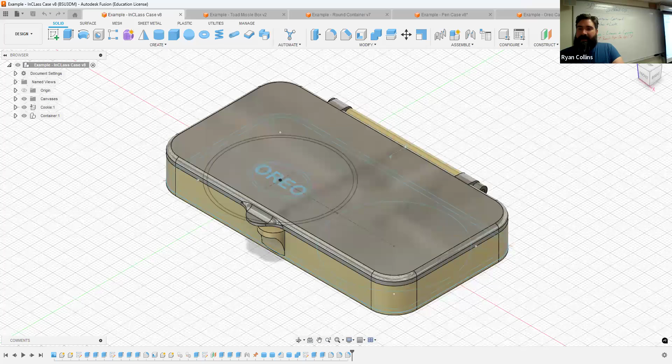So flopping over to Fusion. So last week this modeled this Oreo case to specifically hold two Oreos, just in case. And remember, one of the goals of this is it's not just the case, because the case can simply be a lidded container. Now you can have more than single lids, so if you make it like double doors or anything like that, you make it open up, stuff like that.

More power to you. But it is to hold a specific object, so that means that you are locking in and having, if you need an extra component, which could be like this insert. So if your object is a little bit too small for the container, or vice versa, maybe you want something that holds more than one, you need to have some sort of an insert that takes up space so that the object that you were putting in there fits snugly.

So, even if it's something, forgot the word, not symmetrical, asymmetrical. There we are. I had to work it through. Maybe you're making it for a tool case that holds like a pair of calipers or something. Obviously, it's pretty well good all the way up here, but then the head changes up, so you would need to make something all around.

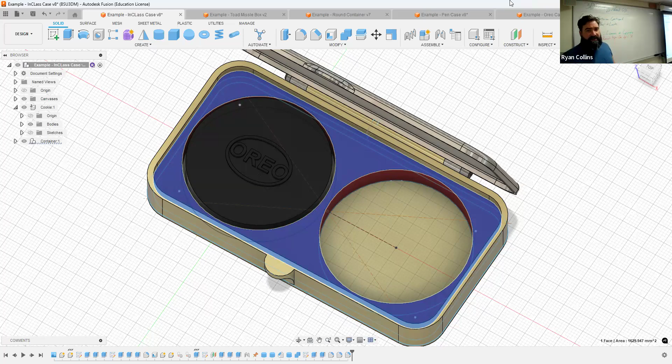Now, again, your container does not have to be standard symmetrical. I don't care if your object or your container happens to be a round container or sphere or something. This is a model I was playing with. This is made from making a shape and revolving it halfway and making two halves of a container, and it opens and closes, that also has one of the things we can discuss, a little bead in the center, or in between, which would make it slightly more weatherproof.

This one also has what we're going to discuss tonight, which is a print in place snapping tab that clears your object with just enough to snap back in place, but enough overlap to where it would actually lock in place. So we're going to discuss that tonight too. All right. And then I'll also discuss how I made the texture pattern and such onto things like this.

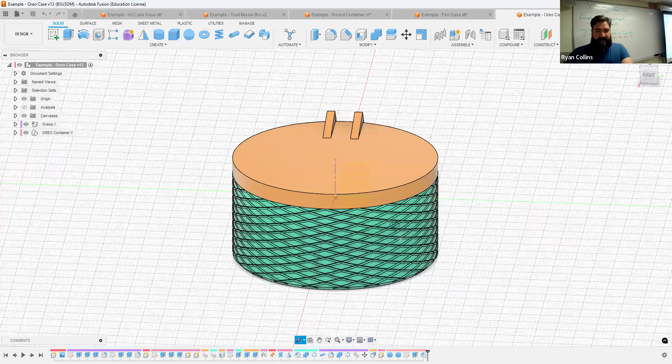But the model I work with is the pen case modeled up last class. No, I modeled up the Oreo case. Same diff, same container there. It currently has little thumb tabs on. So the idea is that you could at least just kind of twist your thumbs and it would pop open. Now, of course, it doesn't actually lock in place yet, and that's what we're going to solve tonight. But since this is a straightforward box, I would like to show more of something if you were to have made a rounded object or not straight up and down.

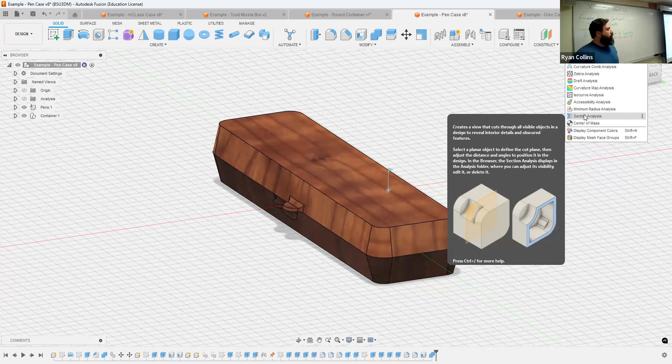Now, one of the things we're going to discuss in how to go about modeling some of this stuff is a section analysis. It's already applied here, it's under the inspect tool. Section analysis simply allows you to create a cross-section view. Now, that does not change your model whatsoever. It is simply a way to view your model. And what I've done here, you place it in relation to any one of the main plane axes. So the XZ, the XY, the YZ. In this case, cross-section you see between, because clearances are absolutely going to be an issue.

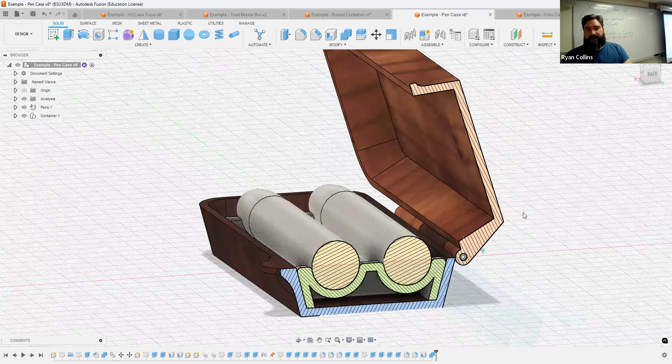So with this model, what I did is made a rich mahogany case that holds specifically two Sharpies. But I also use the section analysis as a way to create the insert that would snugly hold said Sharpie, so it's not just rattling around in there. You can do what you want to do. What this allows you to do is see as it's opening and closing to make sure that nothing is making contact, nothing is intersecting, that sort of thing.

You do have to have your lid and base on separate components, not just objects. They must be in separate components in order for the joint tool to work, to actually get the whole thing to open and close anyhow.

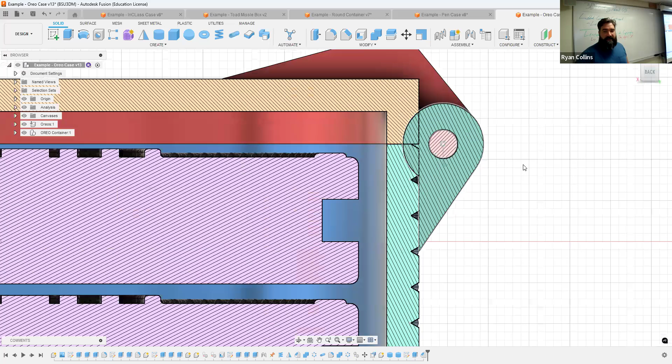So with that, we can see inside, we can look across, make sure that nothing is interfering. I was making this Oreo case and I was making it round. So obviously making a flat thing, being the hinge, on a round thing definitely brings up issues. So when I zoom in, you can see how the hinge for the base model is currently overlapping and intersecting the lid.

Now that part I could easily solve by simply using a combine operation, combine and cut, using the base object as a cutting tool to slice away this partial circle from the lid, and that would clear that up. But that's the kind of things we're going to be working with tonight.

Sorry, just had a little spook there of like, oh no, I do have the microphone on, right?

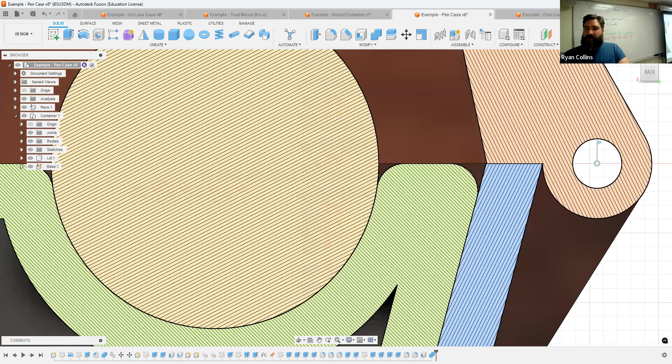So that's what we're going to be working with tonight. And this was the stacking Oreo container. I found models for Oreo, so that's what I was working with. All right, so how do you go about dealing with this stuff? Well, we made this lid, we made this container. And since this is already modeled, we're going to work with this one for now. So I currently made these tabs as just extrusions after the fact.

They're half circles, they extrude up, but one of the ways we were working is adding fillets, so that if we go to print these, we don't have to make a whole bunch of scaffolding supports. It's not impossible to use them, but you could model an object that uses fewer or no scaffolding supports, and it's also stronger. As we discussed before, hard, sharp angles and sharp edges make for a weak point.

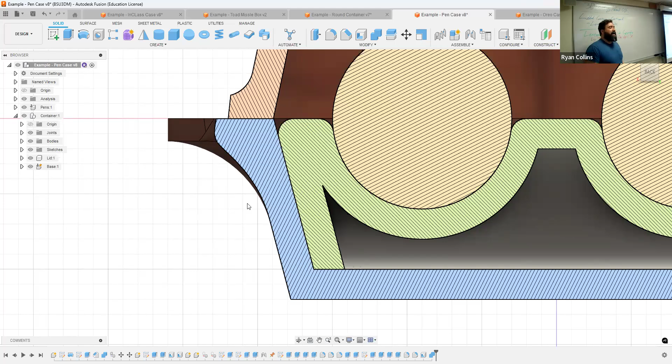A larger curve here allows for the whole thing to be a little bit stronger because, one, there's simply more material. We're not printing these solid, but a curved object is by design slightly stronger than a sharp angle object. The other thing is this overhang, while it might be a little too far outward, with this heavy fillet, this curvature, it allows for slicing without the need for scaffolding. It's not so much that I'm worried about wasting material, but it does add more time to my print. So this is also a convenient way of cutting the printing time.

Same thing with printing the hinge that has such a heavy angle going up to the hinge part. I won't need to put scaffolding on the back either. Now, obviously, the lid would be inverted when I go to print this. Same deal. Got enough of a fillet here that it won't be an issue. And also on the lid, I made the little thumb tab a little bit smaller, so it won't be sticking out in space as much. Same thing goes all around.

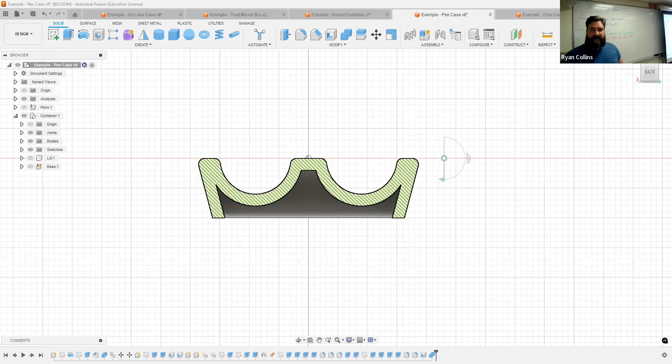Let me hide the lid and bottom and the pens. I made this insert. Let me put away the analysis, as this would just drop into the case, so that would be printed as a separate object. Plus, if I wanted to change stuff out, I could just print the case as it is, and then drop this in. And I even used a shell tool to hollow out some space underneath.

Now, frankly, with standard manufacturing processes, a hollow space would be great if this were injection molded. But 3D prints, at least filament prints, are already hollow anyway. So this is frankly just a little modeling detail. Or they're not completely hollow; it depends on the percentage of infill you use. But it's a nice demonstration on ideally taking up less material. That's all. All right, so let's get back to it.

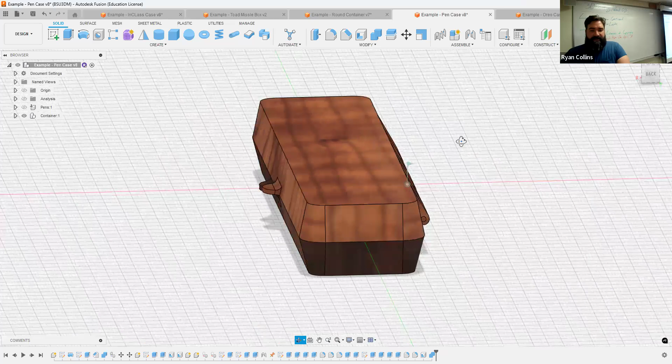We got the lid, we got the case. I can leave the pens hidden for now because they are currently irrelevant. So what do I want to do to make a latch? Simple latch here. We got thumb screws, latch and lock, that kind of thing. It's kind of one and the same; I'll discuss in a minute. The idea of a lock would be more like, instead of built-in, modeled in, this is for my toad missile container. It has the locks themselves move, as well as the container housing a missile. Perfect for the holidays. Pen case. There we are. Okay.

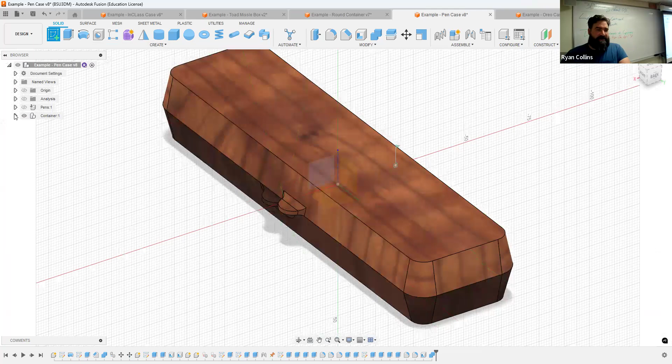So the easiest thing is going to be kind of the same approach that we did for modeling the hinge, in that we're going to switch to side view, and we're going to make a sketch smack in the middle plane there, or smack in the middle of your object. It doesn't have to be, but that is more convenient. Again, if you have difficulty grabbing it inside, just temporarily hide one of the objects, like the lid, that sort.

But it is important that we discussed activating different components before. Now, I made the pens a separate component entirely than the container itself, and the container component houses the two separate components of the lid and base. You can have nested components, but what I do want to do here, oops, I didn't want to add that sketch just yet. Let me go delete that. Because at the bottom of my timeline, when I switch to auto color mode, you can see the coloration delineation for each of the different components, the green all being that insert I used.

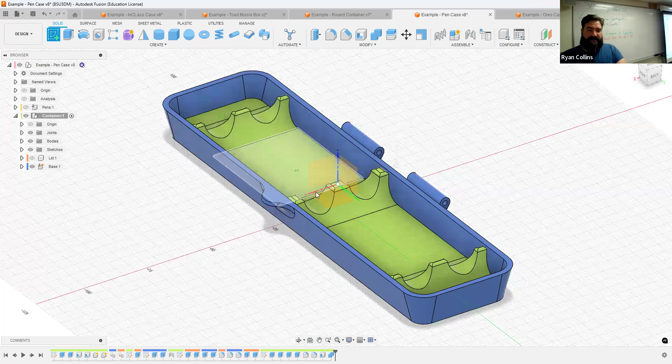So what I want to do is activate the relevant component, which is the container. Now, if you built everything all in the same, not nested, that's perfectly fine. Just activate the whole project. But I'm going to build this specifically inside the container component, but outside of the lid or base. That way, as we did before in creating the joint parts of that object component, I can isolate each one from one another, the lid or base. So I create a sketch bisecting the project here, currently in mine it's the XZ axis. There we go.

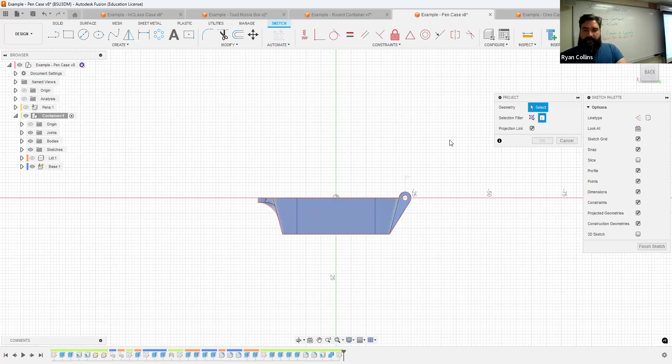Now, since I'm basing all of this on the outline of the container, let's do a projection. Press P or go to Create, Project, and I want to project the whole body right now. There we go. Hit OK. Now when I go to hide the base, I can see an outline. Oh, I don't want that insert right now either. However, that doesn't isolate the tab since I already had that tab made.

You don't have to have the tab. You could do the tab or a latch and such. So as long as you have one of those, you don't have to have both. But since I already added that to this, I want to build around that. But using the outline, the silhouette here kind of messes me up. So I'm going to project again, unhide that base, and use specific entities, and I just want to make sure I grab just the outline, that angle of the side, not including that tab.

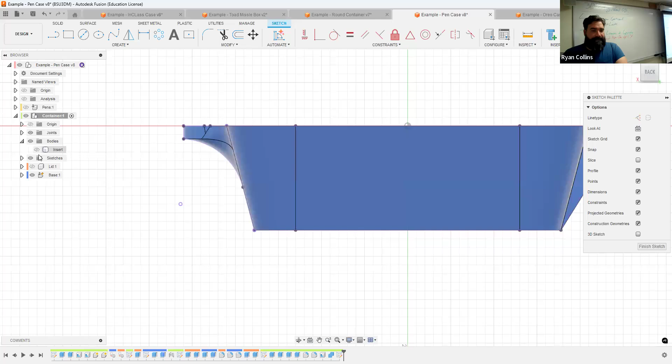Technically, what I could have done is also just done this sketch, moved the history slider before I added this tab, and it would have been the same deal. But since I didn't, and I'm making it after the fact, there we go. Okay. Now when I go and hide the base, I also have that line there. That's important for this case. I'd be doing the same thing for the back, but it's irrelevant right now. Okay. Now I have a functioning outline that I can work from.

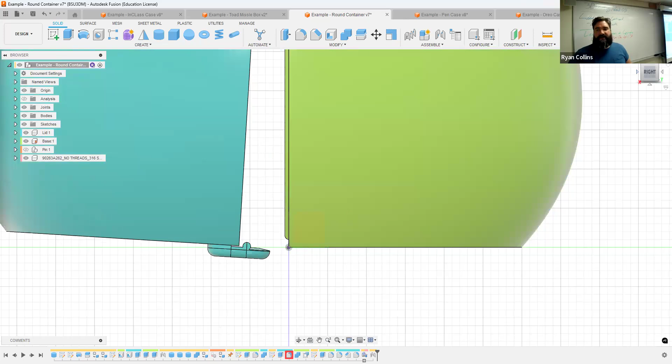So essentially, to make a locking tab, all I need to do, and we're talking very basic here, let me orbit under for this little kind of blob thing, is simply an extension that goes from one side and overlaps the other, but it has enough clearance where it'll still move, but it'll have a little protrusion of some sort that would protrude inside the outline of the other object.

So what I mean by that, I have a section analysis here, let's zoom in a little bit. Now you can ignore this little bump because I made that to create like a weather seal on this container. But what I did is it has an overlap. There's a little gap, but then there's a little protrusion that sticks inside of the outline of the other half of the object. And as I move, it does still technically overlap a bit. That is okay, because even though we are printing in pretty strong plastic, it is still plastic and it does flex just a little bit. So it would push up and around and snap past back and forth.

Now the trick is, don't make that overlap too big to where it won't actually go past, or it'll go past and break the tab off. So this is also one of those places where you have to do a little trial and error.

Rounded part protrusions work well. An angled protrusion works well, but flat with sharp angles, like 90-degree angles, do not work as well. But you can always round that out. The other part of this is where this model I made has this little weather stripping bit here. Yeah, technically that would perfectly fit.

But as we've experimented with 3D printing and such, we know that there is a teeny bit of squish that occurs, a teeny bit of expansion as the filament comes out of the nozzle and gets deposited down onto the print bed. So it squishes out just a teeny bit. This is not precision manufacturing. It gets real close, but we do have to build in a little bit of clearance.

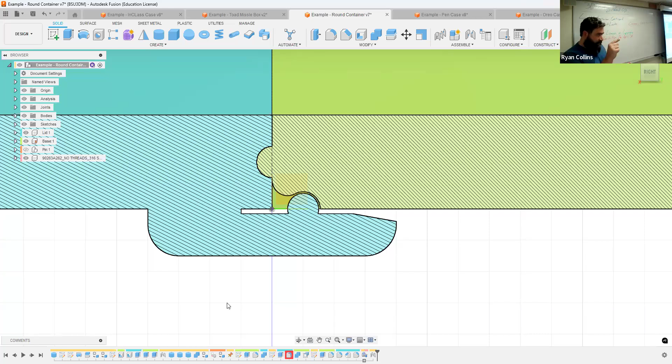The clearance allowances that I usually use are, since we're working metric, usually something around 0.05, somewhere between that and 0.1, 0.1 definitely being on the higher end. If you need, you might go all the way up to 0.15. Again, that's millimeters, so it's quite small. But just that little bit of clearance usually is enough to compensate for that little bit of squish.

So meaning that if I print my hinge here, let me turn off the section analysis. The clearance on this model is no clearance. That little teeny bit of squish might make it to where when I go to print this and put them together, it won't quite fit. So I have to use sandpaper or filing or anything like that. But if I put a little bit of clearance on there, it'll slip right in.

Of course, the flip side is that lack of clearance and having to sand and file an object into place allows you to get a really nice snug fit. Whereas adding the clearance in, it might be a little bit floppier than you would like. So that's the part you have to weigh out in modeling your designs, or trial and error. And hey, if it is a little bit too big, well, print it again. No big deal. Okay, so that's the whole rundown. Let's get back to actually modeling this thing.

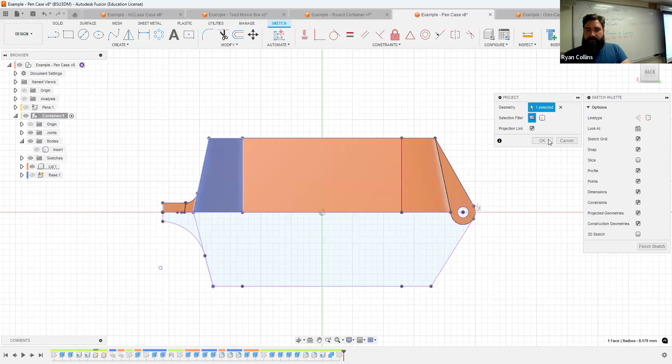So for this, you could draw this by hand, by line, something like that, whatever. But if you want to, again, let the program do the work, just use an offset. I'm going to turn off the chain selection because I only need that line and maybe that line. I don't know why it's going back around the bend there, but let's make it at least a little bit bigger. Let's make it a 2 millimeter offset. Sorry, the word fell out of my head. There we go. So this comes off a little bit. You can see how that's going to go.

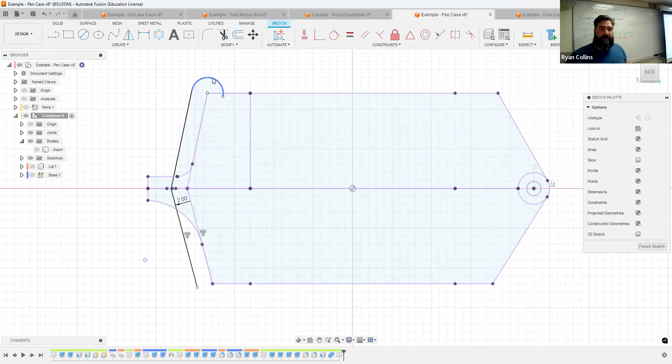All right, I don't know why I did that, so I'm going to delete that line. Oops, not that sketch. Delete that line. Cool. Double clicked. Okay, so I just need to make this. If this were a flat section, I could probably just use a center point rectangle, go out a little bit, make it 4, make the other one 10, something like that. Even that could work. So whatever you want to do, really. I'm just going to model this in a little bit more to match this design.

Delete there, delete there. Okay, so I got this, but this is a little excessive. So let's chop it up. Let's draw a line. I'm just trying to define how far down I want to go. All right, 5 millimeters seems reasonable. And I'm just going to use that as a reference line, so press X to turn that into a construction line. All right.

Now I'm simply going to draw across to close that part of the sketch. And I'll do the same up top. If you want, it doesn't even have to be flat. You could make this at an angle or something. Basically, you could treat this like the backside when we were modeling the hinge. Cool, whatever. So I know I'm going to have these sections there. Great. Finish sketch. There we are.

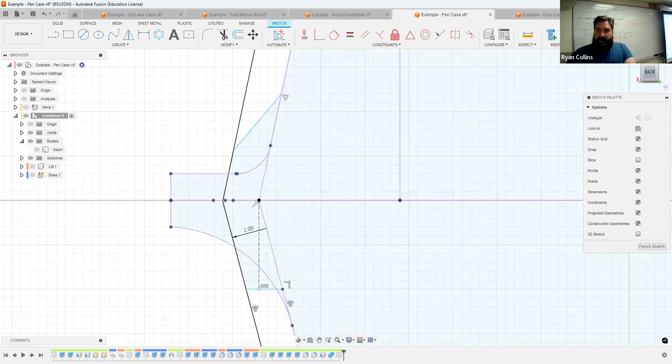Okay. Now for right now, like we did before, I want to extrude this, but I want to make sure that it automatically bonds into this latch and such. So let's make sure I grab those sections. Of course, the problem is now I have multiple stuff, so hide that object. So I just want to make sure I'm grabbing the sections that go across. Problem is since I have kind of a complex shape here, it gets a little obnoxious. Not a big deal.

All right. We're going to extrude that. Didn't select all the things. But, oops, I should have done that first. Make sure that you activate the component that you want to attach this to, being the lid. So, even though it's hidden, when I go to press extrude and select those chunks of that sketch I just made, when I start to extrude it, I have the body hidden.

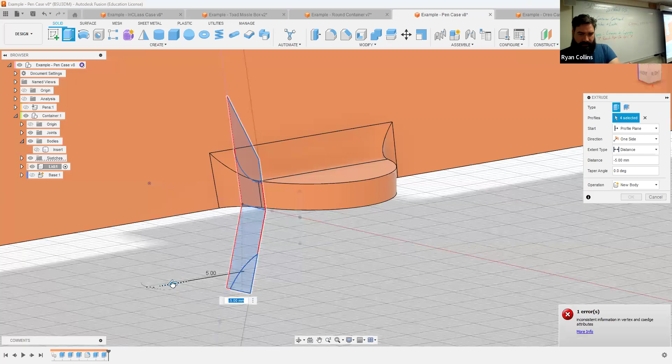Where'd you go? What's going on here? Why is it? What's going on here? It's not extruding. Always something new to discover. What's the problem here? Sorry, give me a second. I'm not sure why this isn't extruding.

Okay, sorry about that. Figured out what it was. The sketch that I had built had a bit of an error in it. So what I did is I reactivated the whole container project, went back into the sketch. So edit sketch, went back in here and made some adjustments and turned a couple of these lines from regular lines into construction lines, so it did not interfere with the sketch as badly. So that should have corrected it.

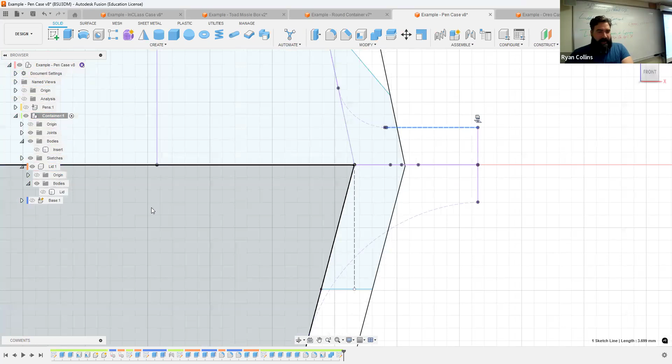All right, so back to activate the lid component. I want to extrude. And if I have difficulty grabbing that sketch, I am also having issues because this tab is here. If you do this after modeling the tab, don't. Okay, so I was just trying to get those two pieces. Want to extrude outward. However, it is currently reading it as a cut because it is placed here. You will not have to deal with this if you just model this as a latch instead of a thumb catch here.

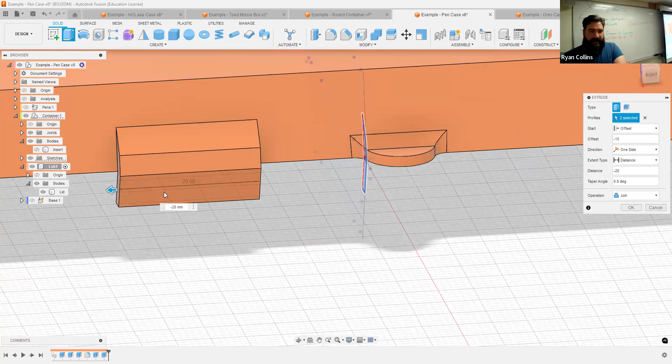So I'm going to have the start point as an offset, and let's go -15. Just moving it over here a little bit. Now I can set this -20 as how wide I want to make the little latch piece. Ideally, you'd be placing this smack in the middle of the model. But since I currently have it as operation join, even though the sketch is under the container component, I activated the lid component, so it automatically is joining to the lid as part of that component. Hit OK. All right, cool. So that would be a latch.

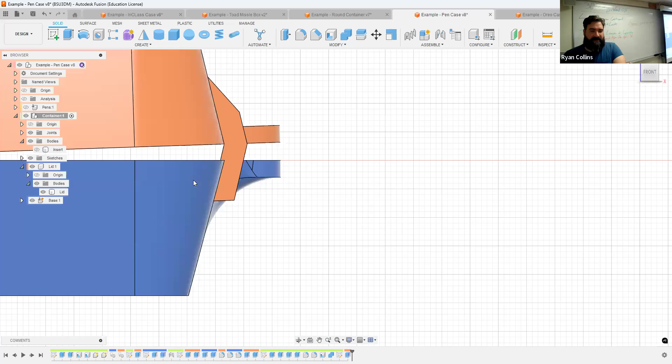Now let's look at the base. Obviously, this is going to cause problems because of the way this object is modeled. Because when I go to open this, look at how much intersect is happening, how much is being overlapped there. So what that tells me is two things. One, I should do this not on a tapered model. But beyond that, I need to shrink the length of this tab. So let's go back and edit the sketch just a teeny bit here. I should have had this sketch line way up here somewhere.

Cool. So all I need to do, let's just trim that down. I'm just grabbing a line somewhere. Sounds good. Okay. I go to edit that extrusion, take out that chunk. Now we're just having this little section here. Cool. I'm still going to have some overlap, but that's all right. I'm probably going to need some of that.

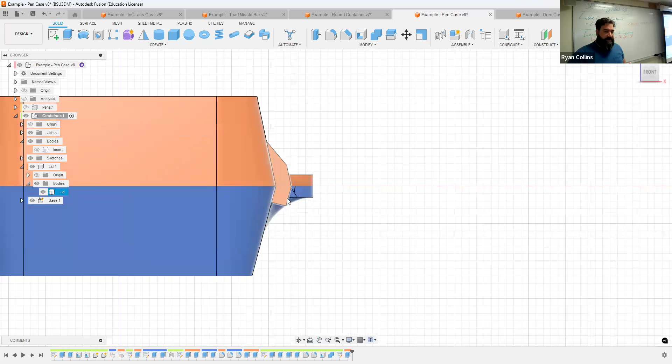So one easy way around this, if you have an inconsistent container, like it's tapered or something like this, honestly, the best way I have found: base your drawing, your model, or at least this part of this tab, around a circle that starts in the center of your hinge.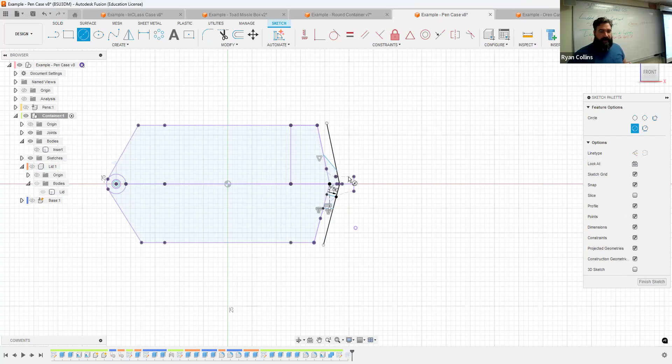So one more time, let me go back into the sketch. Let me hide these two components because it's just in the way. And I'm going to draw a center point circle starting smack right there where my hinge starts. And then I can just draw outward. Let's see what would be reasonable as a way to clear. So if I bring that circle all the way over here to that center point, hit OK, finish sketch. So now I have that big old circle. It seems utterly excessive, kind of is, but it's way out here.

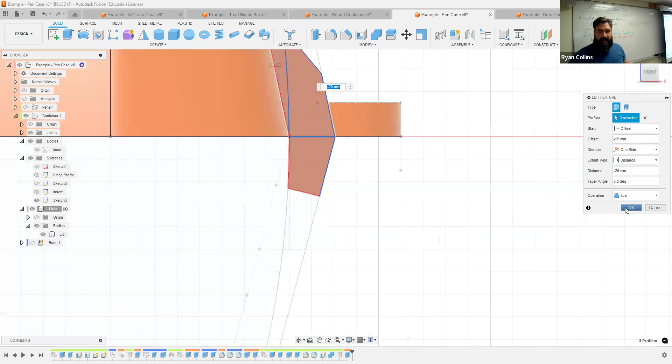Let me go to finish sketch. Hid the stuff because I had the... there we go. My hinge sketch. I don't know why it automatically hid. Let's go back to that last extrusion. Edit that sketch again, edit that feature. And I want to consider that circle line. Just going to deselect just that part of that tab. Hit OK. All right. Now left this kind of seemingly big old chunk here. But when I go to open this, now it does not intersect, overlap whatsoever.

So adding that circle as part of your sketch based on the center point of your joint is an excellent way to just very easily consider the clearance regardless of the outline of your container. As long as it is opening based off of that circle, you're good. Now we still have to add a little tab in there, but we'll deal with that. Okay, cool. Got that sketch, got all that yada, yada, yada. Now I can go back and edit that sketch a little bit. What did I show before?

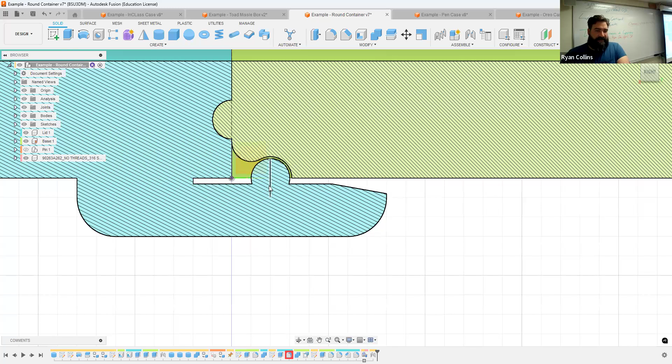In my round container, I made this, let me snap back in, section analysis. I used a circle. I have found that starting with a circle makes it a little bit difficult because at some point trying to consider clearances, you're going to have this little point where the circle starts to go back on itself when it gets past the halfway point. So a little extrusion that is instead rounded seems to work a lot better. So let's go with that. So if you want, you could have included this in the original sketch, or we can go back and add it. So once more, we had edit sketch.

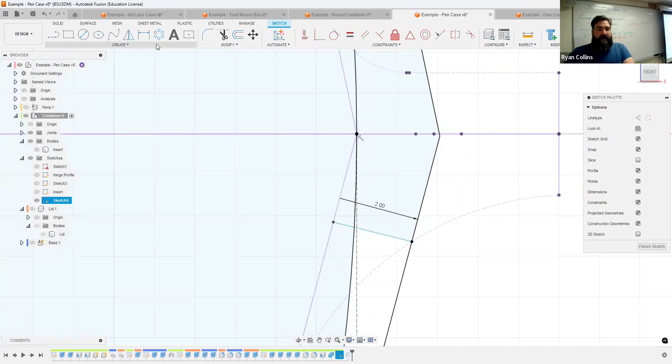Okay. Hide those parts because they're in my way and they're just obnoxious. Cool. Now, my sketch is getting a little complex here, so it's a little bit difficult to see, but that's just because I started adding a bunch of other stuff. If you start with that circle and then just kind of build outward from there, this will be so much more simple to work from. Oops. Deleted the wrong line. Cool. Okay. So I need to add something right in here. So let's add a center point rectangle. Cool. Based off of that line, somewhere up here.

Honestly, I don't need it to extend very far. So let's say to 1. That's pretty significant. 1 millimeter, at least on this design, should be all right. Tell you what, let's just make it a square. 1 by 1. Cool. All right. Go to finish sketch. Once again, one more time, edit that extrusion. I want to include that little chunk of the tab, join. Cool. Now my model, oops, lost where it was. Now my model just has that little point in there.

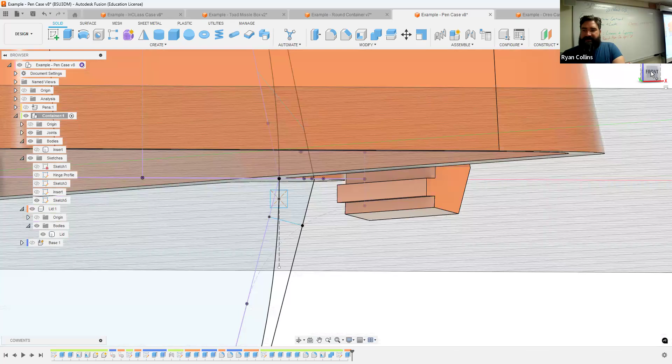Great. I'm not going to worry about it, since I already know it's going to clear the actual overall tab, but my chunk here is going to protrude a little bit into my design. Good. I want that little bit of a catch. Now, again, if you have quite a tapered model like mine does, you might want to extend it a little bit further, but we'll deal with what we got. I can always make that a little bit longer if need be. Okay, cool. So let's hide the base for a moment. And now let's just kind of tweak this a little bit.

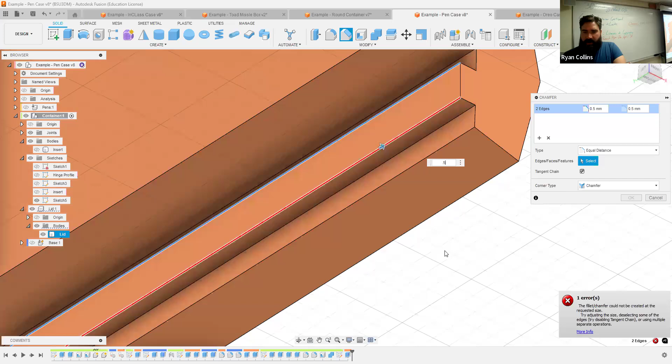Easiest way to work is either a chamfer or a fillet. So let's put a couple of those onto here. Whoop, whoop. It keeps snapping my model way over there. You definitely want to put a chamfer or fillet on these edges. Let's go by 0.1, 0.5. Why is 0.5 giving me... Oh, because it's not that far.

Let's say 0.3. There we go. You definitely want to add a chamfer, especially to the bottom or the leading edge, but might as well even those out. You could use a fillet as well. Doesn't matter if it's flat or rounded, either one. But again, a sharp edge is going to run into things and is not going to allow it to clear whatsoever. Cool. Okay, great.

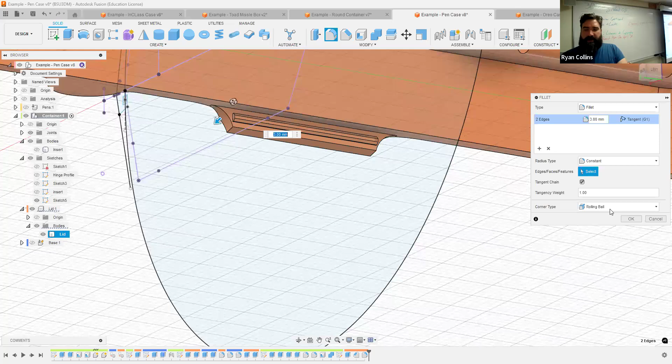From there, if you want, you can go ahead and make any changes to this as you like. So things like if I want to start adding fillets to add a roundy bit onto the sides here, cool. Why not? Let's extend that out, like we did for the little tab there. Neat. Let's throw a little bit more here. Repeat fillet. I want to round that out a little bit more, just so it's a little bit stronger. There we go. It even extended past my original model. No biggie. Okay, cool.

I've also found that if you add either a chamfer or fillet, let me hide that sketch, it's just in the way, to this leading edge here, you can kind of get your thumb underneath it a little bit easier if you needed to. So let's add a chamfer to that line also. Let's see how far I can go. Ooh, that'll actually work pretty well if it's still modeling okay.

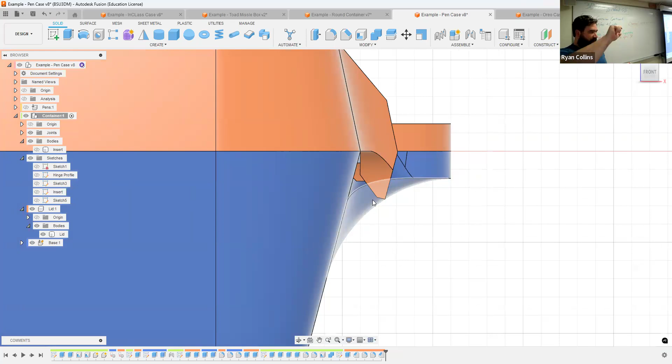Great. Because now when I go to the side, unhide the bottom. Okay, for the other side. There we go. Even though my little tab definitely now intersects inside, that little bit that protrudes has got a little bit of a back cut to it, so I can get my thumb in there and help pull the plastic just a little tiny bit when this is printed.

Cool. All right. So how do we figure out clearances and all that kind of stuff? That's where we throw that section analysis down. But my section analysis is way over here. No big deal. All we need to do is edit that analysis. So go to edit feature on that, and it's on a slider. So just drag it back to where it makes sense. Somewhere in there. Now it's getting to where I want. Now I can see my overlap, and I can work with that.

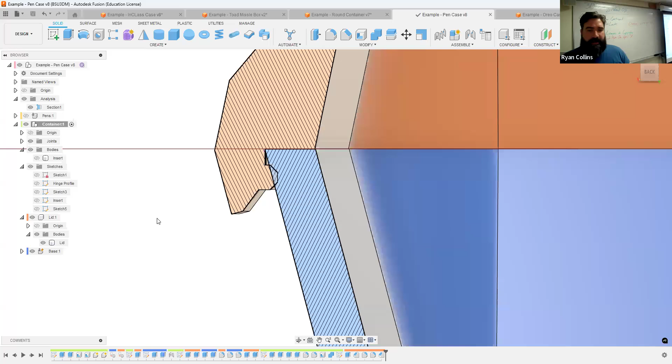Cool. So now what I need to do is make a recess. This is the easy part. But before I go any further, what have I not done? Saved. So, add tab. Cool. Save often. Okay. This part's the easy part. I'm going to use a combine tool. Go to cut. My target body is the bottom half, and my tool body is the top half. Make sure you select keep tools. Otherwise, it'll just delete the whole top. Do that. Hit OK. Cool.

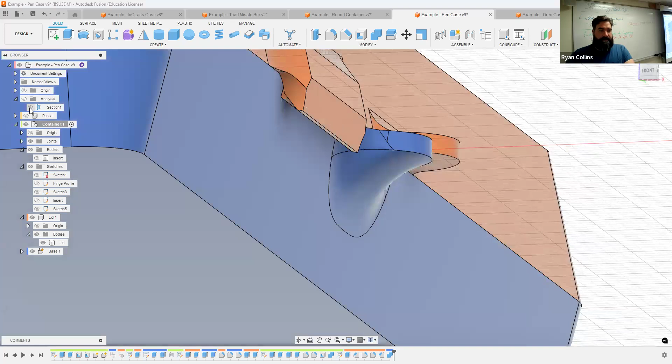Now I go to hide the lid. Now my model, let me hide the section analysis, has that little tab slot in there. Now, again, because I already made this little tab here, I'm going to get some funky results because it's deleting little chunks in there. But honestly, it'll still work because it fits. That little tab, turn the section analysis back on. Oops. Now, as I zoom in, whereas I had an overlapping design here, the colors overlapped, now it does not.

One last thing, though, I do want to build in that little bit of clearance, because right now, if I printed this, that little tab is going to be pushed just a teeny bit outward, and it might not snap into place as well. So let me hide the lid, and I want to isolate just that. Turn off the section analysis again so I see everything, but you can still model with the section analysis on, so long as you're not having to grab something that is currently hidden. Because again, Fusion works on what is currently visible.

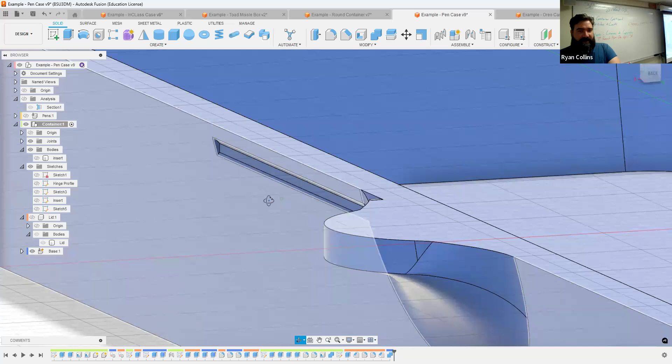Now, what I want to do to add clearance to that is a different version of extrude. It's the first one over here. It's called press pull. Basically, it's an offset face. It's still an offset tool, just like we've been using to make multiple lines, anything like that. The hotkey is Q if you want to use it just on the keyboard. But it allows you to simply modify geometry that's already there, like it says. Not animate because I moved my mouse.

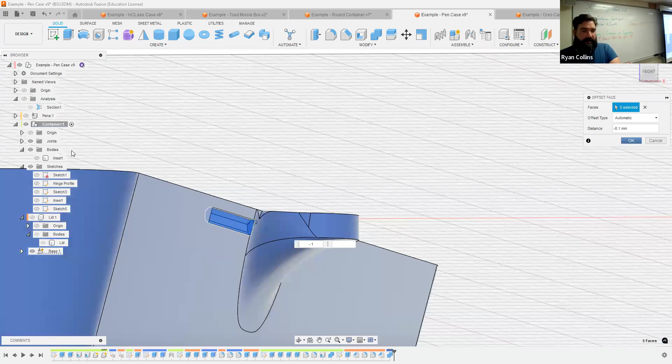So what you can do, go in, select the faces. I want all three of those back ones and also the two sides. So grab that, and I'm going to offset, we'll do 0.1. So what that's going to do, oops, I shrank that. Make sure it's negative. There we go. 0.1, there. Activate section analysis again.

Unhide the lid. Now, when I zoom in, I've got just that teeny little gap, which frankly looks enormous in this case, but it's pretty tiny. Honestly, if you feel like it's a little bit too big, go back in, edit history, or edit feature, and let's turn that into a 0.05.

Cool, there you go. Now, one little thing here is you might end up with that there. You got a little bit of a catch there. I think that'd be fine. Actually, a little bit snug right there would be fine. And at worst, if you printed this and there was a little bit of an interference, use like an emery board or some sandpaper. Honestly, emery boards are some of the best tools to use for modifying prints, and file that little chunk away.

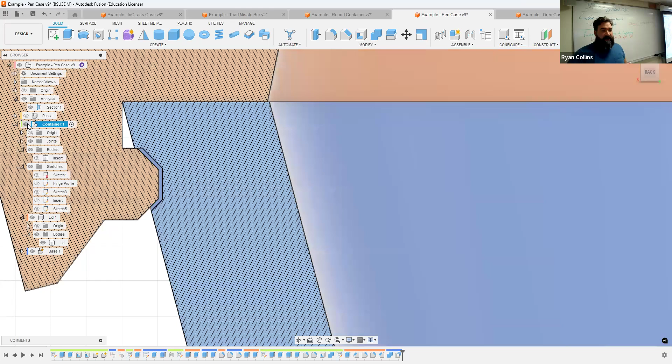But there you go. Seems a very roundabout way of working, but basically all we did was just make a cross section. The only difficulty there was simply that I had already modeled these finger tabs in. All you need is just some kind of projection that goes from one side to the other, that's got a little thing that sticks out and goes technically inside the other object. Again, my round container is a much better example.

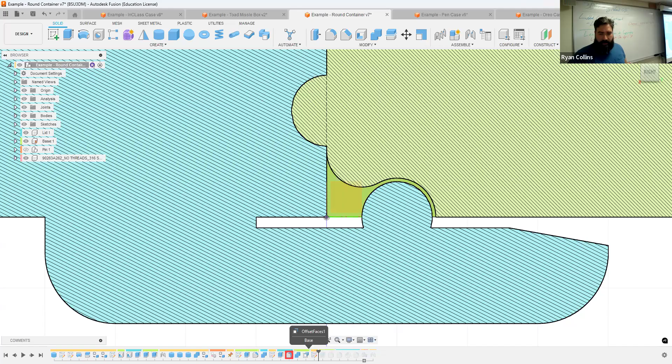And this one, because of how this was modeled, what's going on here? Originally, it was just a cutout of this circle, so a semicircle, and I used like a 0.05 clearance there. However, there was still a lot of material right here. So what I had to do was make a new sketch underneath, and I'll show you this. I had to hide the lid, and I made a new sketch of just this little tab here.

There is just a little chunk, extruded it upwards, just so I could push this little bit up a little bit. And you can see as I go back and forth here, all I did is I would just push this material up a little bit using a press pull, just so I had a teeny bit more clearance.

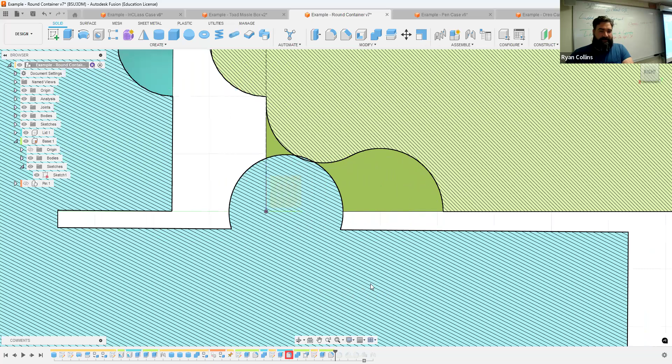Now it was still going to intersect a whole lot though, even with that amount. Again, this is like a 1.5 millimeter diameter circle, or radius, I forget, sorry. So what I ended up having to do is add a fillet to these two sides, that when complete, round it out. Now I still have just a teeny bit of overlap. That's okay. That will allow my print to work back and forth.

Now, one thing about this print here, as I've designed it, I want you to note what I just said before. Sharp angles are weaker than curved angles. So right here, I've actually accidentally modeled in a very weak point. This print goes back into itself by just a little bit. So I'm creating a stress point as I try to push this past. I'm very likely to break this off.

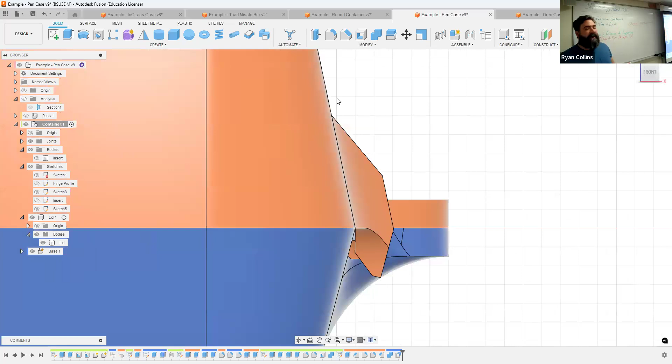But in this little section in between, if I close this off, modify the original sketch for the tab, and even better, if I add a fillet from the center line to the bottom of this circle, I will make that tab much, much stronger. Same thing for over here. If I add a fillet on the back side here, like I have done with my pen case design, or in this case, a much larger chamfer, same deal. I've just gone beyond the simple right angle and added material to it. It makes for a physically stronger print, a physically stronger design.

So there you go. Simple tab, really easy one. We'll take a pause, and then I'll show you how to model a more involved lock. Okay, so like I just said, for the sake of time, I will, in a separate video, discuss making the actual lockable latches, the separate components for this. It's basically a combination of the thumb catch latch that we just made for the pen, and the general hinge. It's just a little bit of both.

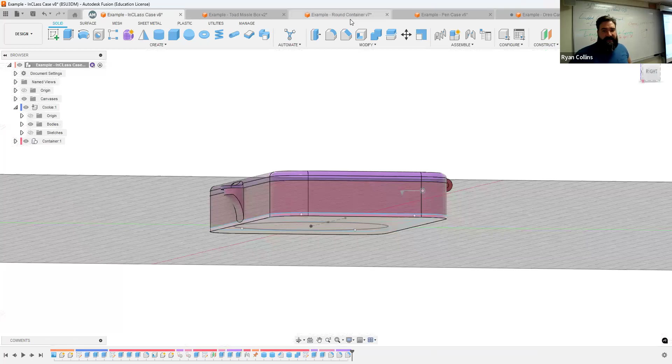So for that sake, I wanted to specifically discuss how to work with a hinge on a round body. So far, all of these models, even my technically rounded container, the hinge was built onto a flat shared surface. So with this Oreo case here, what I did is really the exact same thing, but let me show you what I did here. Activate container, and when I made the hinge, let's see here, I forget where exactly I built this, prior to all of that. All right.

So what this would have been is I took an outline, a projected sketch of both the lid and container, and then just like we've done before, made my hinge design, based directly on the split line. So I drew a circle out from there.

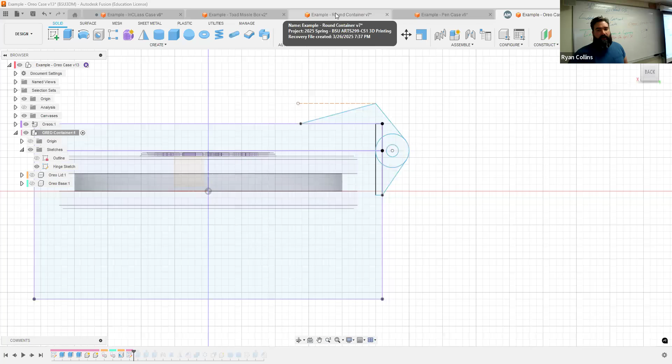But what I did with this one, instead of like the pen case and such, where the hinge is floating entirely outside of the body of the container, for this one I did have it overlap, and it actually begins on the inside edge. So what I did for that is I used a 2-point circle. So I'll go into edit circle. So instead of using a center point circle, go to create circle 2-point, and I started there and drew outward. And it's a 5 millimeter circle.

With this one, I was still intending to use a bit of filament fed through, but that's also large enough if you wanted to open up that size and use actual rod or threaded rod or a long screw, you could totally use that too. But I just made that the extrusion, drew my ears onto there. This one I was playing around and made more like a big industrial hinge on top. That of course presents problems for printing, but I'll deal with that later.

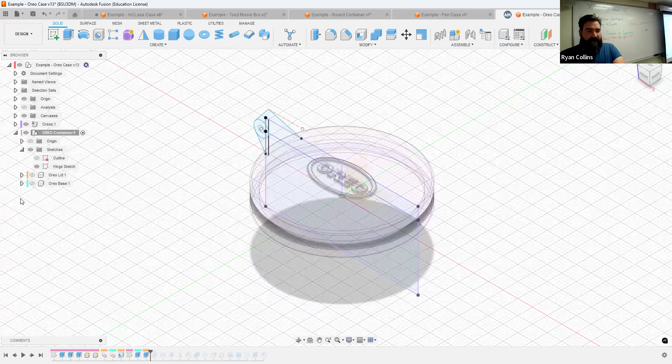From there, like before, adding the extrusions of top and bottom, activating one component, making the extrusion for one lobe, activate the other component to make the extrusions for those two. Whoops, I didn't mean to do that. There we are. So now both lobes, both sides, adding the joint tool so that it now opens and closes. Oops, that's before I grounded one side.

Now with this one, I did also go through creating these knurls on here, but I'll show that in a minute. The main issue with this model is if I go to the top or bottom, well, you can't see this clearly from the top, but from the bottom, since I'm making straight extrusions, that does not match a rounded surface. So how do you compensate for that? Well, one of the easiest ways is actually using the press pull tool that we just went over.

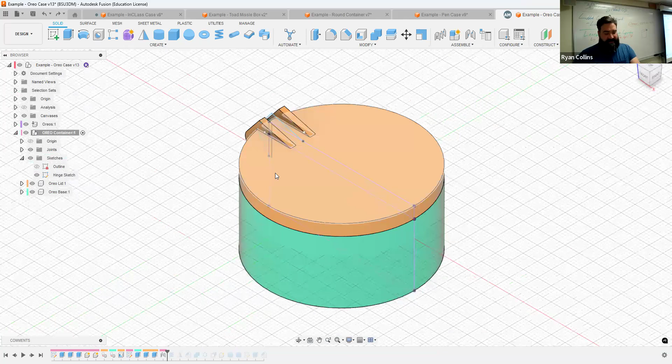Now you can of course always go back in, modify the sketch, and simply make that sketch of the inner of both side lobes extend internally within the walls of your model. But the issue with doing that is, what if you have chosen to make the walls quite thin? This one has plenty of material there I could have extruded outward from. But if you made them quite thin, it's a little bit more difficult to deal with.

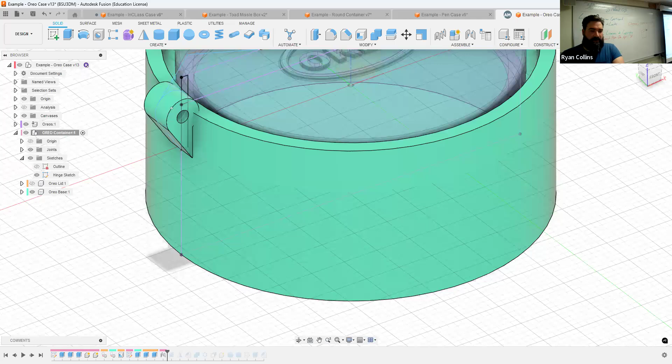So how I dealt with this, and I can do this before or after making those knurls. In this case, I'm going to do it afterwards, but you could do this before you added features. I'll explain this at another point. But how I did this is I used the coil tool to create an outline, which is this tool. It is essentially a pipe tool, just built into a spiral. It automatically generates a spiral path instead of you drawing your own path. So it's essentially a pipe tool, and you can select different profiles.

In this case, I chose a triangle, mirrored that triangle. Sorry, let me move in the center. Mirrored that triangle, and then, well, I put a chamfer in there. Cut into the surface, and then used the circular pattern tool to make a whole bunch of them. And that's how you make a knurling surface. It's a neat feat. It's a really simple way to make what looks to be a really complex thing.

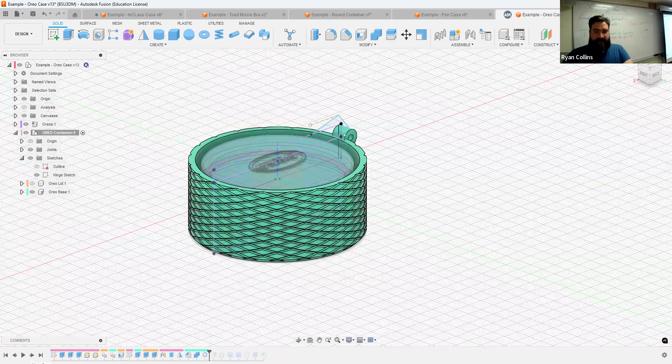Anyway, let me snap to current. And that was just showing the Oreos inside, and I'll hide those. And I also added a little pin screw here that I imported. I'll hide that. So how do I deal with this? Well, the problem is I joined the two together.

So the way you have to fix this, go back, edit feature, and instead of join, I'm going to make that a new body. So it's still there. It's all good. It's got to recalculate everything. So this is floating. Now I added this onto this component, so I have the box and the hinge. Perfect. Because what I need to do, I'm going to hide the body.

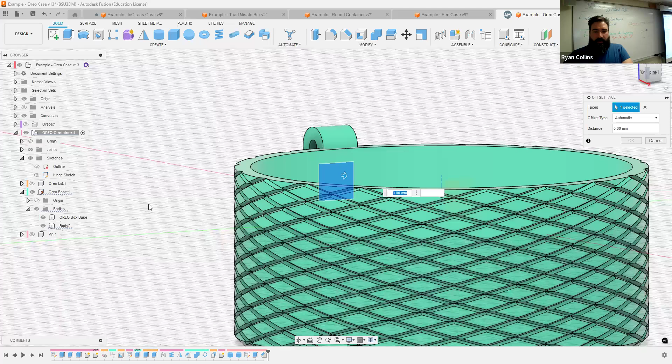And I'm going to use that press pull tool and select that surface, unhide, and I'm simply going to drag that forward a little bit. So what this will do is it just closes all that up. So it simply extruded that surface. And the cool thing is because of the way that the press pull tool works, it is an offsetting tool instead of just a direct extrude. If I hide the Oreo box, look what it did.

It even filled in what was that little half circle there. See, when it was here, it filled in both this surface, even though that's all I have selected. When I pull it forward, it flattened it out to here. So it's a really cool feature to use that is a combination of tools, basically offset and extrude.

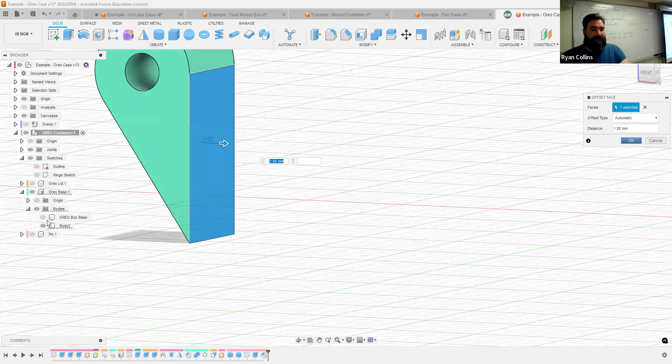So go to that, unhide there, and now I would go to join the two bodies together, combine the target body and the hinge tool. Do not cut. I want to join them. Bam. Now that is linked, it fills in the gap. It does, and it also compensates for the knurling and such too. Really cool way to work. Do the same thing for the lid.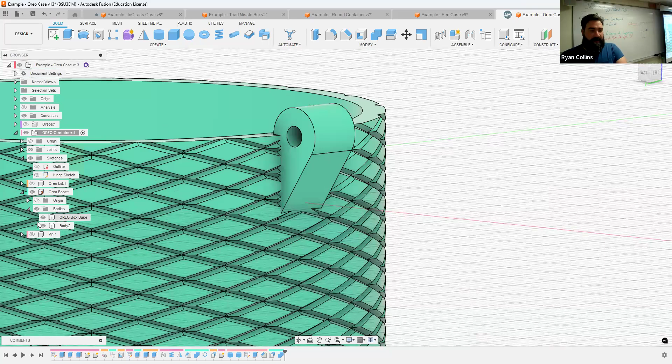Hide bodies, just the Oreo box, because it looks like when I did the extrusion for that one, it already went there. Okay, yep, never mind. So yes, same issue here. Oh, this one I already did the offset face for, or the press pull. So I was able to do the exact same thing there and fill in the gap.

So if I go to here, edit that feature, I was able to grab an internal surface where at that point there was a gap, and I was able to grab that internal surface and just pull it forward, and it just filled in the gap there. So now I have a function here. So the issue is I needed to grab this one too.

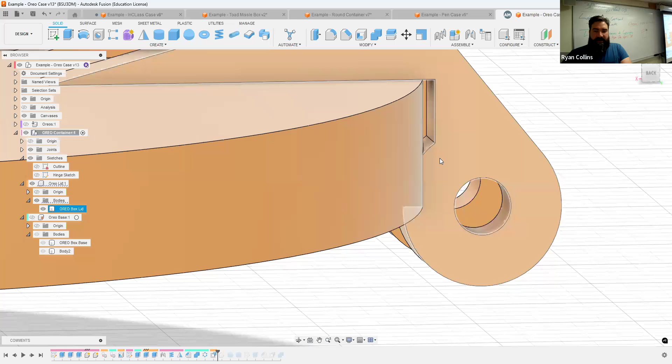Problem is, what I did is I had them join when I did the extrude. So if you accidentally do that, you can go back and modify that extrude to where, instead of join, it could be a new body. See if it kicks back a bunch of errors or anything. Nope. So that simply means that I could use the press pull right there, drag it forward, and then that will fill in that gap.

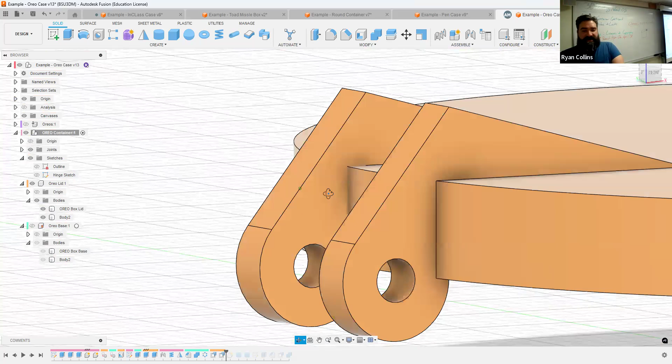Or for this one, it was already joined. So what I was able to do is zoom in and select within that gap. I was able to actually select one of the surfaces and use the offset tool. Sorry, I keep saying offset. It's press pull. Same deal. Just make sure that after the fact, you join the two together.

Since that one was two separate ones, let's go to combine, join. I want to join that tool or that part onto body. Hit OK. Recalculate all the things. Unhide, unhide, unhide. There we go. And now it works, and all the gaps are filled in and all that kind of stuff.

The one last thing on here was if I go to section analysis, it intersects there. Not a big deal. Easy way to fix that too. Last thing, activate all the things. Turn off section analysis just to make sure that it is doing what it needs to do. Sorry, I keep losing where it is. There we are. I need to use the lid as a cutting tool. Wait, let me make sure of that.

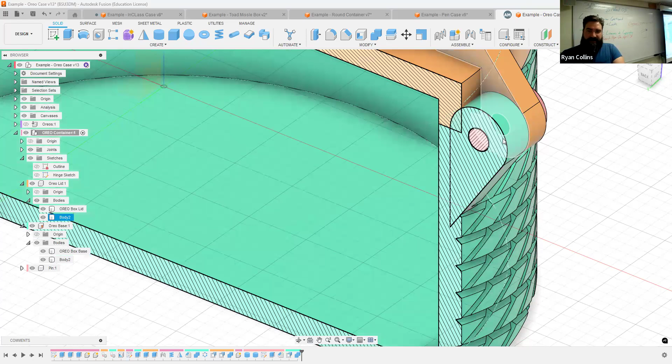Yes. See how the base intersects the lid right here? So I need to use a cutting tool. So combine tool, go to cut. The target body is the lid; I need to cut into the lid using the base. Make sure you select keep tools. Hit OK. Now, did it do something weird? Now when I hide the base, it didn't do it. Okay, that's a problem. Let me do that again.

Oh, it didn't do it at all. Okay, hang on. Let's try it again. I'm not sure why it didn't. I don't have an error message or anything like that. So let's try with the section analysis off. Okay, cool. There we are. Okay, so I need to use combine, cut. I need to cut into the lid.

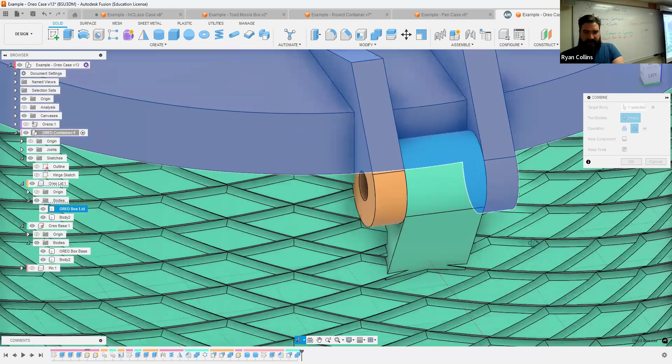Why is it? That's weird. That should be joined. All right, tool body is the base. There we go. Let's try that again. What is going on? It's not doing it. And I'm also not getting any errors. That's very strange. Oh, for some reason there's a split to it. Weird. It made two bodies there. Huh. I've not had that happen before.

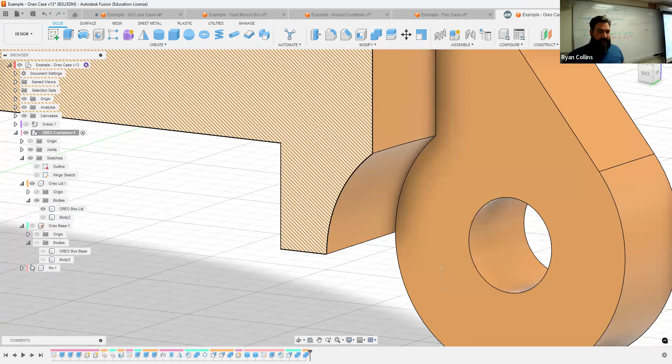Or did I accidentally use? No, I used combine. That is really weird. Okay, somehow it made two bodies and it split the body instead of cutting and deleting. So I don't know. There's entirely a chance that my program is bugging out a little bit. Okay. Section analysis done. Where is the other? What?

Okay, my program is doing some really weird stuff, but I also needed this to delete into the main body also, so you have to perform a second one. Select the body, tool body, cutting tool is the lid, keep tools, there you go. So now what should be is when I hide the lid, yeah, there's a recess now also for that side. So I'm getting some weird results.

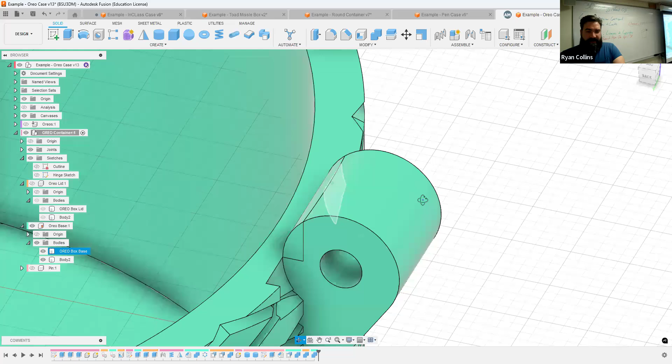And see, it's splitting the body instead of deleting it. So I'm not entirely sure what's going on. I think the program is getting buggy or something. So hopefully you don't run into this issue. If you do, let me know. That is definitely a new one for me. Don't know why it's doing that.

But anyhow, the whole point is you use one object as your cutting tool, just like we did for making the latch there. Use the one object, make the cutting tool, and it simply should delete an area away. I don't know why it's not doing that there. I'm gonna have to go back and do some work on it. So, all right.

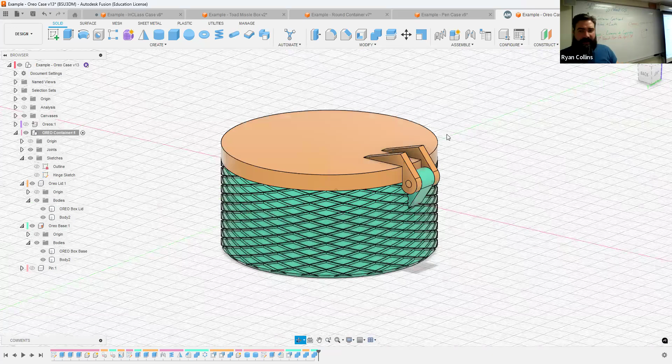So, like I said, I will do the flip locking mechanism on a separate video, isolated from here. I quickly talked about how I made the knurling there. The one other thing I wanted to show you is if you want to bring in objects, like this pin that I used here. So this is actually a model.

You could use insert fastener, which brings in screws and such, or if it's a tool or a screw or something you specifically want to use, there's another one called insert from McMaster-Carr. This is a fastener company where you can search out your hardware, be that screws, threaded rod, all that kind of stuff. You find the object you want. So in this case, I'll just pick a screw at random.

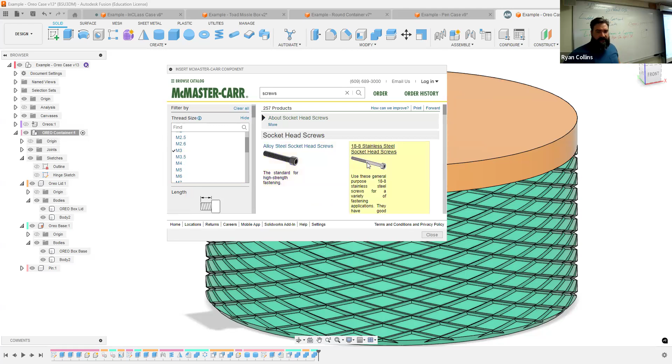So it was metric. Let's say that was an M3 hole. Excuse me. Let's say I want a socket headed screw. Sure, stainless steel all the time. And let's just say I wanted, I don't know, something. You simply go to, I had to expand it, go to the actual product number.

This is important. It will automatically import, but we're not using SolidWorks. Scroll down and use the step file. So if you need the reminder, the next step is use a step file. Helps me. Download, give it a second, and it will import the model of the exact type of hardware screw you want to use into your project as a new component, if it actually goes through.

Come on, buddy. I think I'm overloading my computer entirely. It pauses for a second. Okay, plops it into your computer.

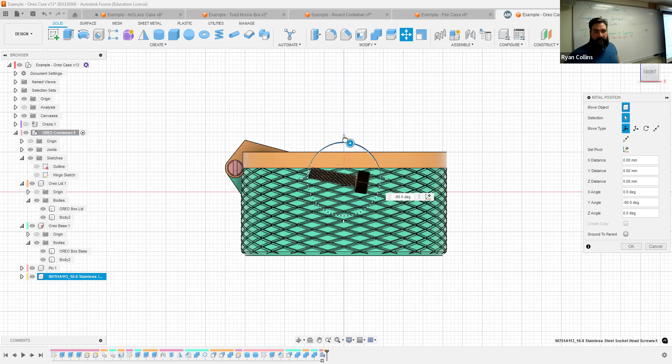You can simply move it around however you want, orient it generally how you expect to put it. So let's say 90 degrees that way, and I intend to put it in just that way too. So I'm going to orient it 90 degrees that way. Hit OK. And then you can pop this in place using the joint tool. So you go to joint. We're going to use a standard thing.

Remember, the first thing you select is what will move. Second thing is where it will move to. So I want the bottom of this face to match up with that hole. So what I'm going to do, select the inside. Now this is threaded, so it's a real pain to get at. So what you do, mouse over the surface you need, press and hold control. It locks it. I can snap inside of the threads there to the very base.

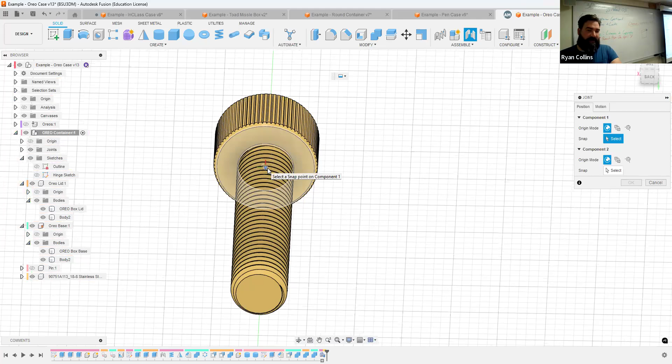There we go. The whole thing has a screw in there, so you're actually using the hardware you really intend to use. Just an easy way to go. Just a quick thing to consider if you actually want to use dedicated hardware. Save it all out, and we're all set. Okay.